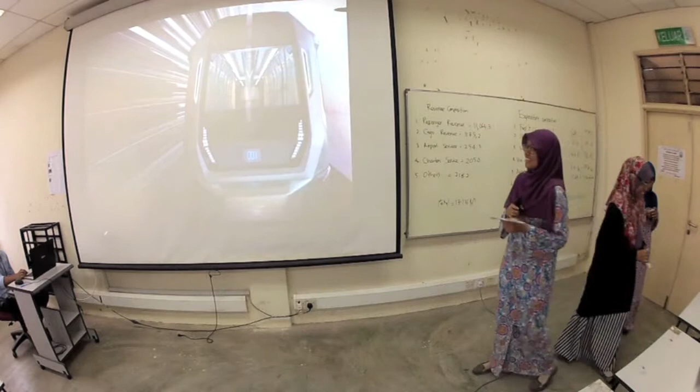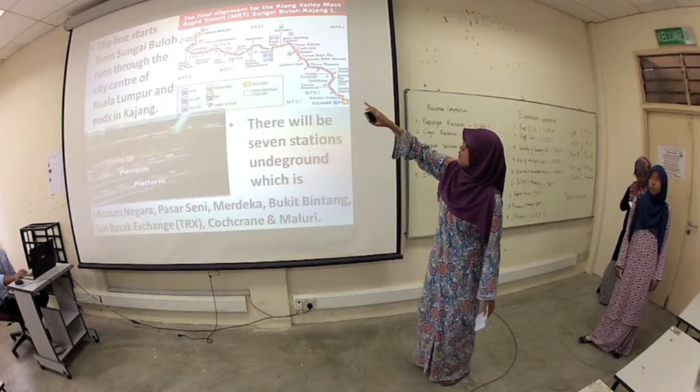The MRT Sungai Buloh Kajang Line, the first MRT built in Malaysia, is about 51 km, from Sungai Buloh to Kajang, with underground stations at about seven stations, which are Muzium Negara, Pasar Seni, Merdeka, Bukit Bintang, Tun Razak Exchange, Cochrane and Maluri.

Next, tunneling was chosen because the city centre of Kuala Lumpur is already developed. By tunneling, there will be minimal disturbance to existing roads and the city landscape. It will also minimize the impact on traffic and business activity during the construction period.

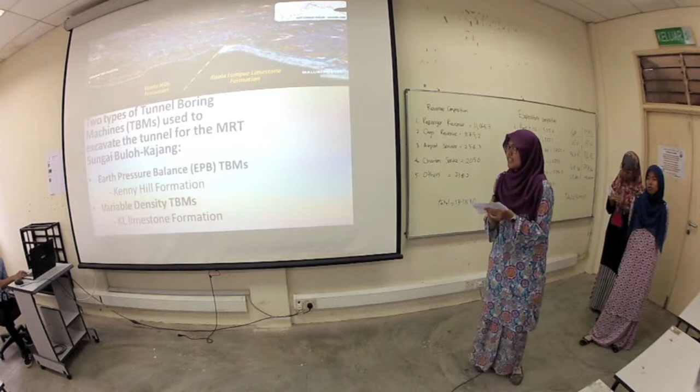There were two types of tunneling methods used to build the tunnel: earth pressure balance TBMs and variable density TBMs.

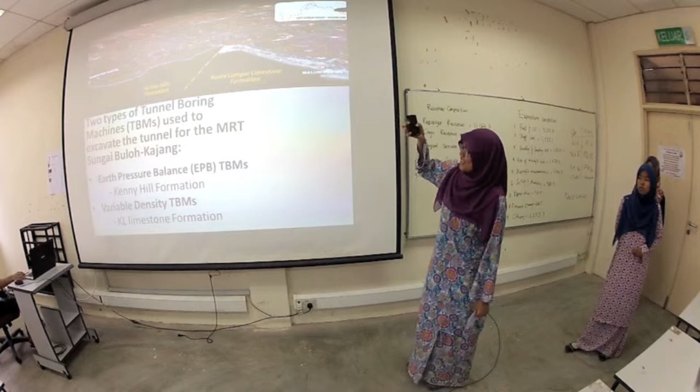In Kuala Lumpur, the underground has two types of formation: half is Kenny Hill Formation, half is Kuala Lumpur Limestone Formation. Kenny Hill Formation does not have any resistance, but for Kuala Lumpur Limestone Formation, they use...

...variable density TBMs because they have cavities there, and they needed two companies to build those TBMs, which are MMC Gamuda and Herrenknecht AG of Germany. Next, I pass to Shifa.

Hanis Fazilah Hassan, director of stakeholder relations and land management. Zaharuddin Saad, general manager of property development. Next, the profile of MRT Corp.

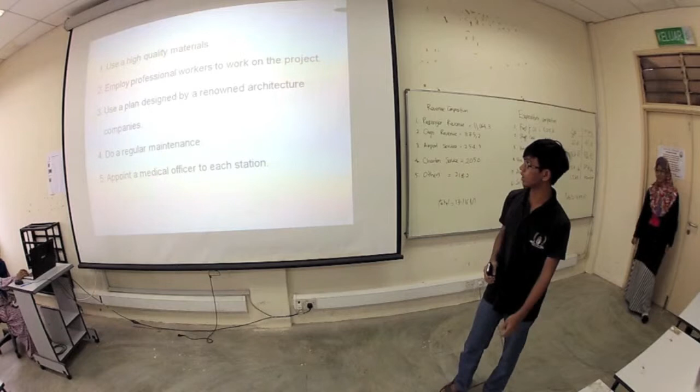The second one is employ professional workers to work on the project. Professional workers know what they have to do, so we can trust them fully 100%, and they can work on the project very efficiently.

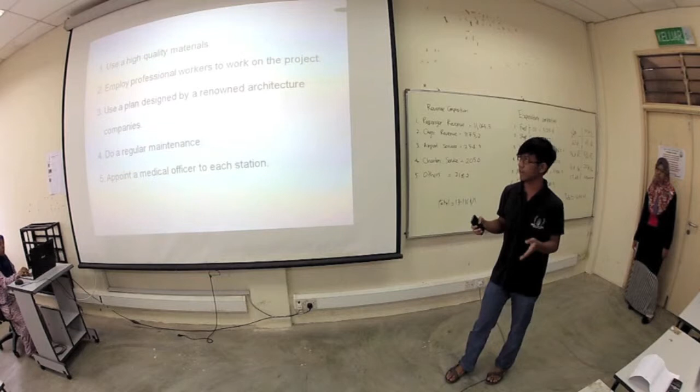The third one is use a plan designed by renowned architecture companies. This is because renowned architecture companies are very professional. They know what to do, so they will come up with a plan that is very creative and unique, so that the MRT will look magnificent and become very attractive.

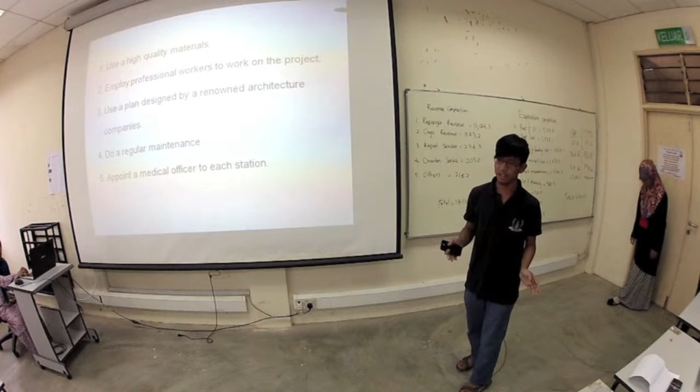The fourth one is do regular maintenance. Regular maintenance is like an officer coming to the project daily or weekly to check on it, so that if there are any errors, the officer will point it out to the workers there so that it can be corrected.

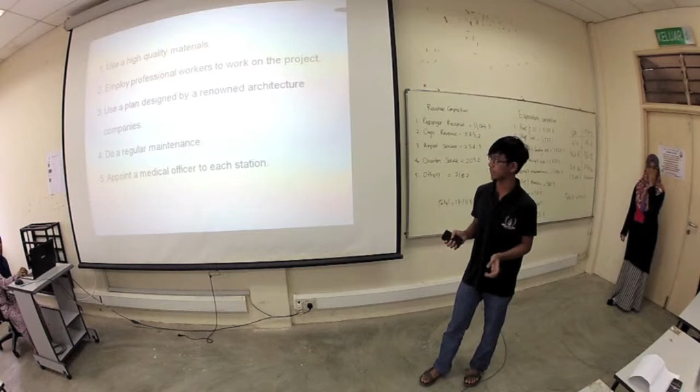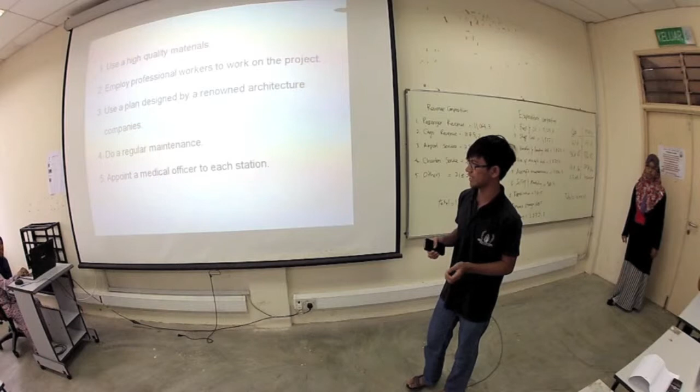The last one is appoint a medical officer to each station. This is because if an unexpected thing happens, like an accident, this medical officer can quickly react and save whoever is injured at the workstation.

Moving on to recommendation: of all the proposed methods, we choose the best as employing professional workers and using high quality material. The project can be done in a short amount of time with the use of professional workers.

Besides, by hiring professional workers, they will do their work very carefully, in detail and quickly, so the amount of error can be reduced significantly, leading to lower casualties. The use of high quality material will ensure that the railways and support beams become more rigid and solid, helping the project to be long lasting, thus the cost of maintenance can be reduced.

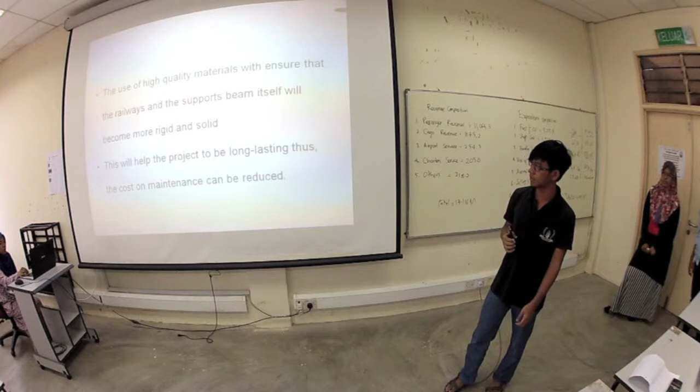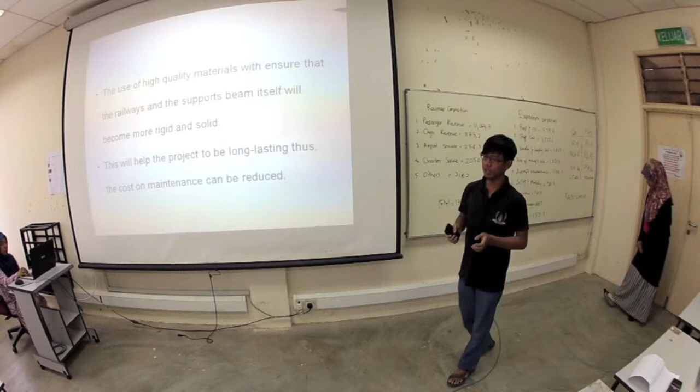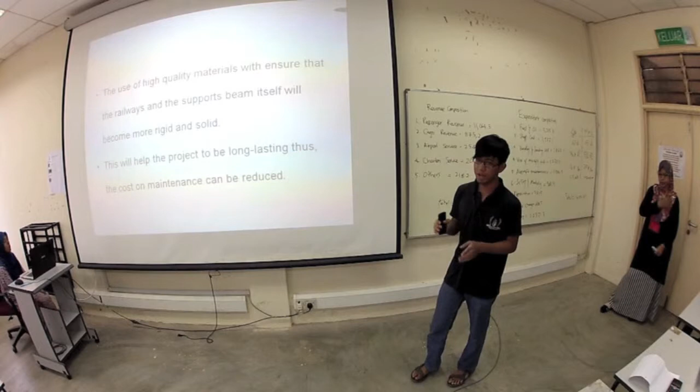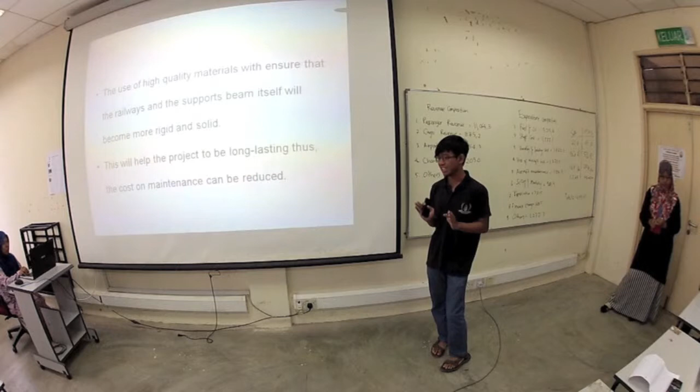What I would like to say is, we come out with the best or a perfect solution so that the MRT project will become very successful, so no more accidents or the fall of MRT will ever happen again. But we also pay close attention to the cost so that the final project cost will be moderately low. So this is what we need: a perfect MRT project with low cost.

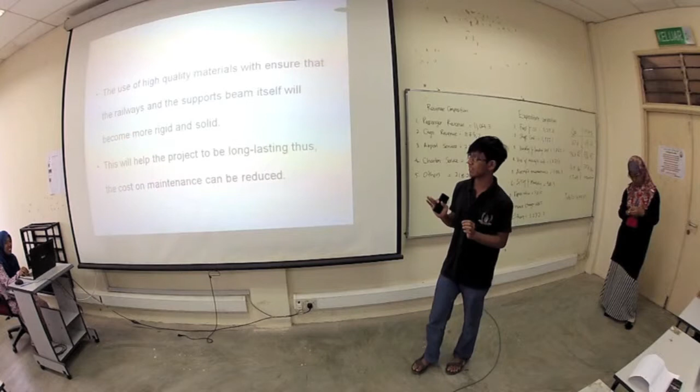So I'm going to talk about the costing. As one of the teammates said, our recommendation was to use high quality materials. Mass Rapid Transit Corporation says the total cost to build the Klang Valley MRT Sungai Buloh Kajang line will be within RM30 billion on budget and ready for opening at the end of 2016. From the 30 billion, 23 billion of the cost is for system and construction, while 7 billion includes fees for consulting and reimbursable for the project delivery partner. The 23 billion includes raw materials, machines, equipment, labor salary, transportation, lawyers, agreements and insurance.

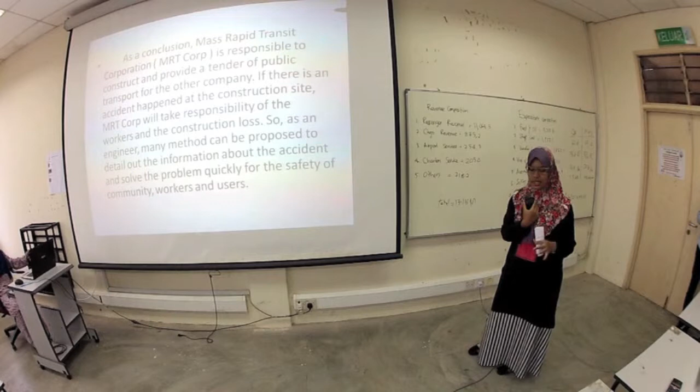I would like to conclude that Mass Rapid Transit Corporation is the company to construct and provide a tender to all the other companies of the public transport. So if any accident happens there, MRT Corporation will take all the responsibility for the workers and the construction loss. So we, as engineers, must propose many methods to detail out the information and the causes of the accident. We hope the problem can be solved quickly for the safety of the workers, community and users. Thank you. So now I would like to open the Q&A session.

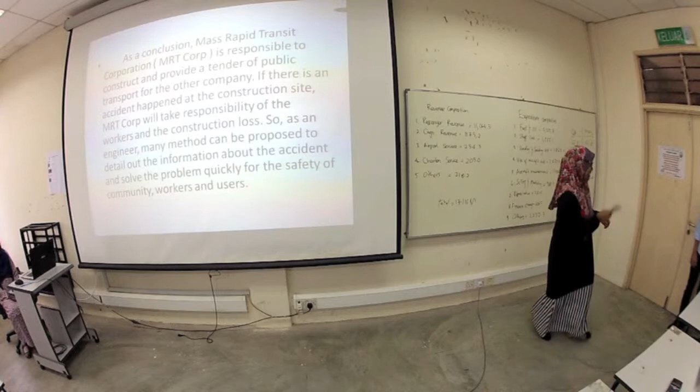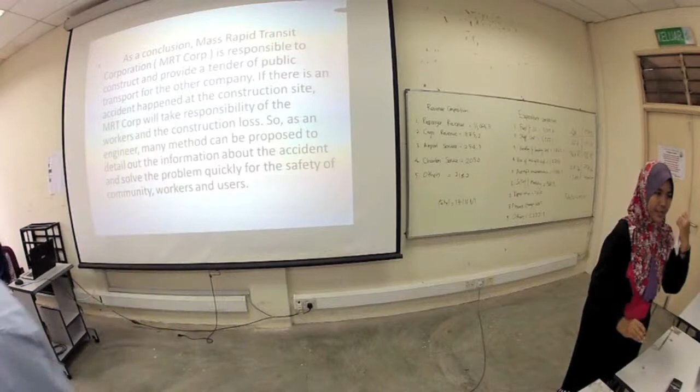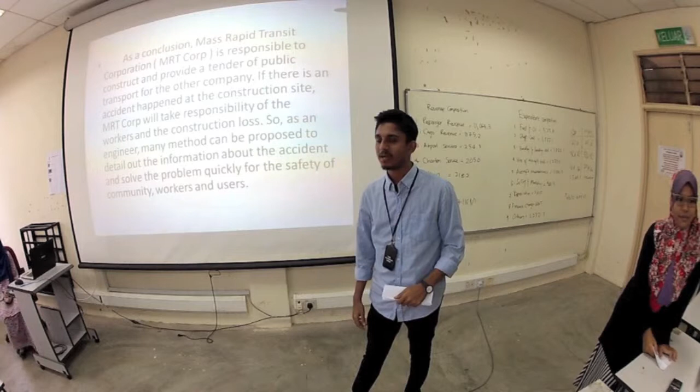So I just want to ask, when does the MRT start their operation? Thank you. When does the MRT start their operation? Thank you.

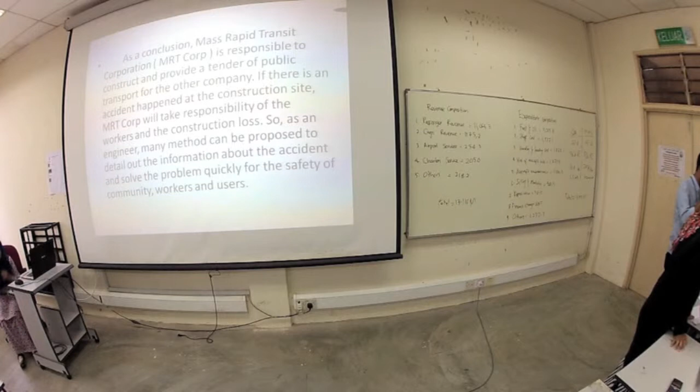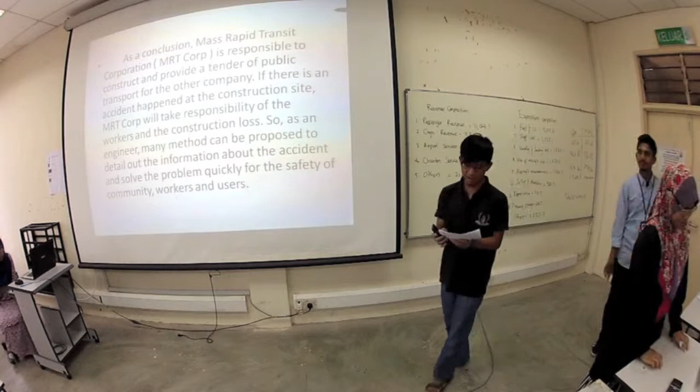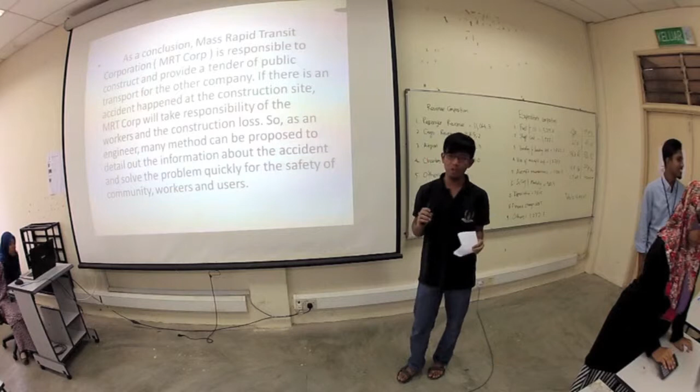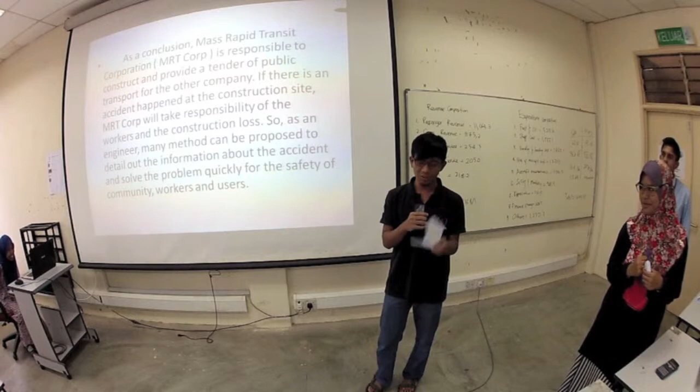Okay, so the MRT project has two phases. The first phase is the MRT Sungai Buloh Kajang line, from Sungai Buloh to Semantan, which will be operational at the end of 2016, while the second phase from Semantan to Kajang will become operational by July 2017. So is that answering your question?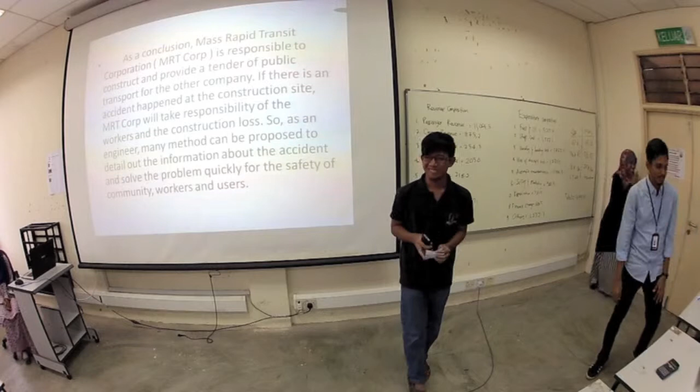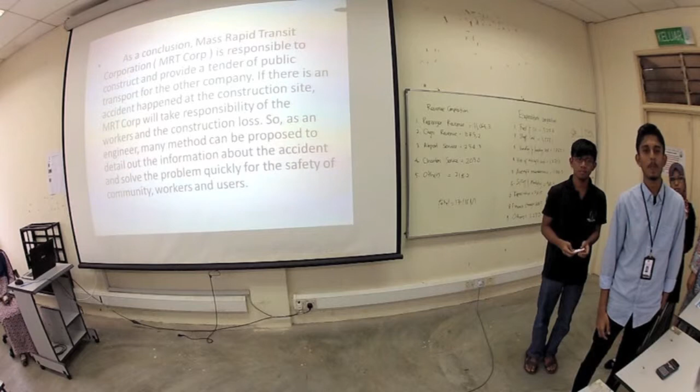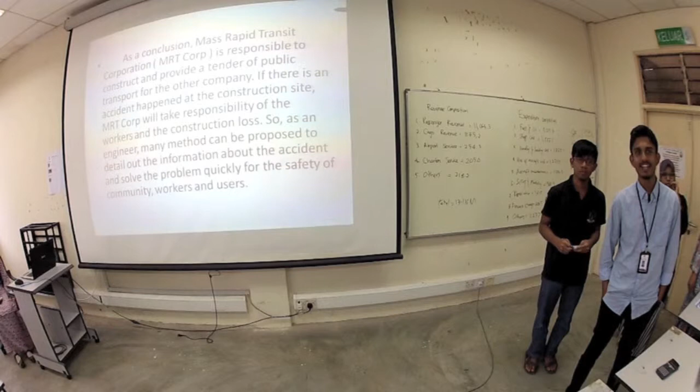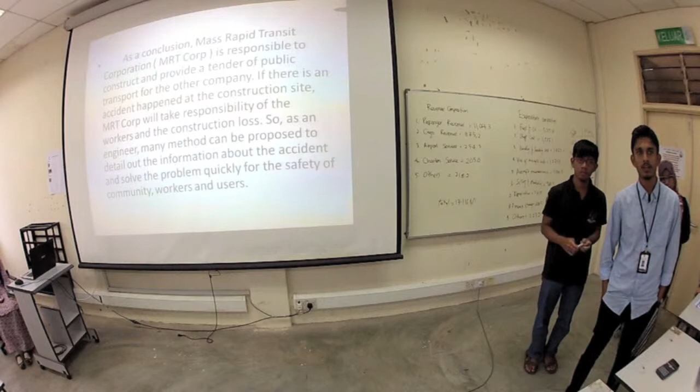Okay, so for the whole 17, 18 minutes, you are explaining how to better build the MRT system. But the topic is how to prevent another disaster of an MRT system. MRT system has been under construction for almost 2 years now, and then disaster happened. So the question is why it happened and how it happened. You should provide the proposed method on how to prevent it happening, such as a better SOP. This is clearly you're saying like you're building another MRT system, not improving the construction of the MRT now. Explain, thank you.

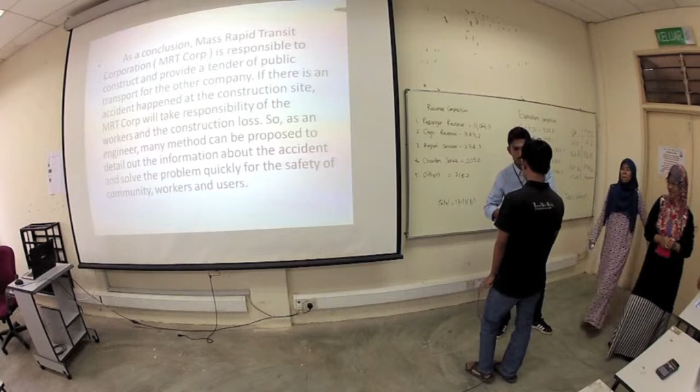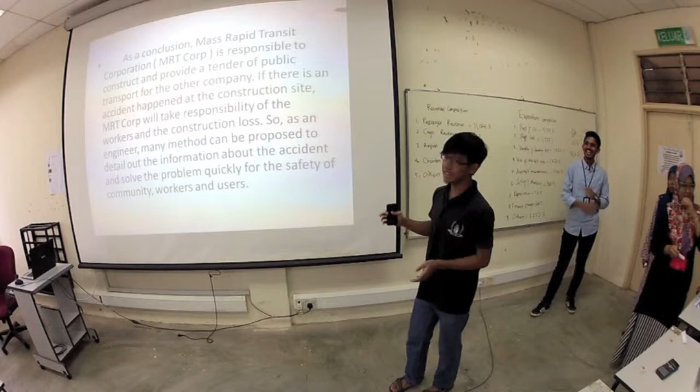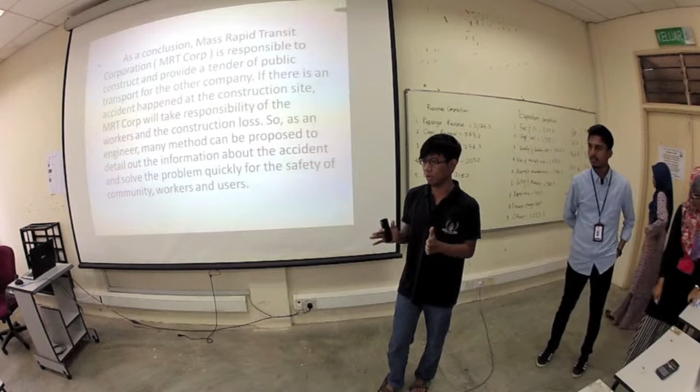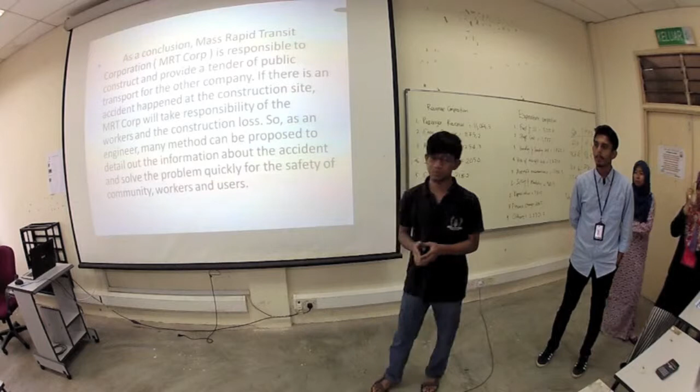Okay, to answer the question, we are really trying to improve. We are not creating another one. The accident happened because the quality that has been used is not so good. They are the lowest of the lowest quality, and the workers, as we can see in Malaysia, are like foreigners from Nepal that are not very skillful. So we try to get workers that are more suitable, more professional. So that's what we try to do. We are not trying to build another one. We try to improve it by getting professional workers, by using high quality material, so that it will prevent the MRT from falling again. So is that answering your question?